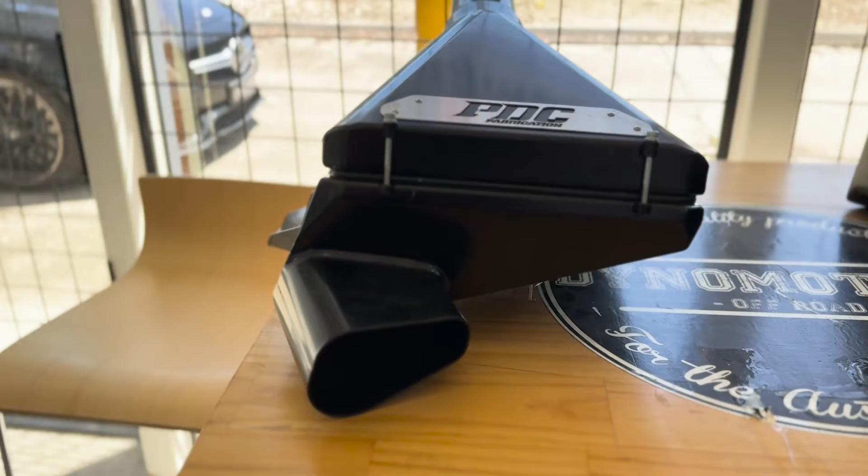air filter as well. And we did all the R&D testing on this one to make sure it did flow. He went back to the drawing board quite a few times to actually get it right. He's a fabricator with mechanical knowledge that it actually needs to work and not just look pretty.

Then we have the AFE cold air intake, and that's exactly what it is. It is a cold air intake, not designed to be plumbed up to a snorkel at all. This is for if you're going to be touring with a caravan on the back, on the blacktop, dusty roads, all of that, that's fine, but it's not made for river crossings. So there's two very distinctly different styles of air intakes for your 300 Series.

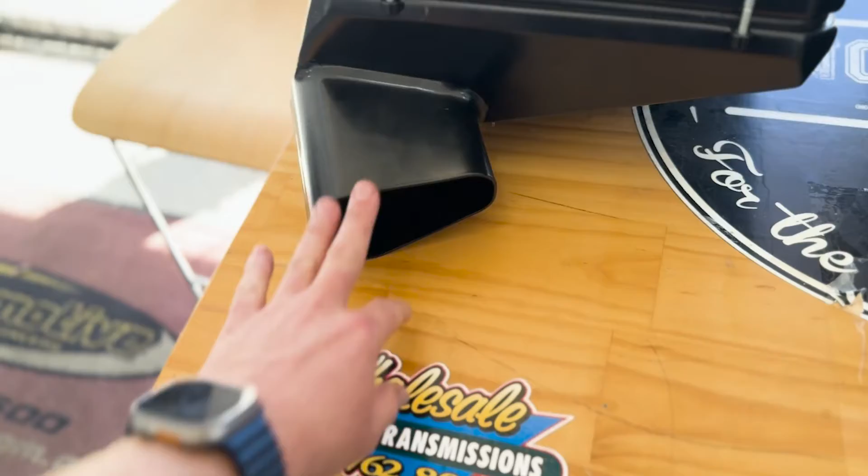I'll spin the camera around, you can check this one out. You can see it's got the pod filter. We've got our intake tube here with the airflow meter, and then obviously the large airbox. And they've done the same, so it's got the larger intake on it. You can see here they've got a large intake hole on it as well where it plumbs up to the guard. It is a big airbox.

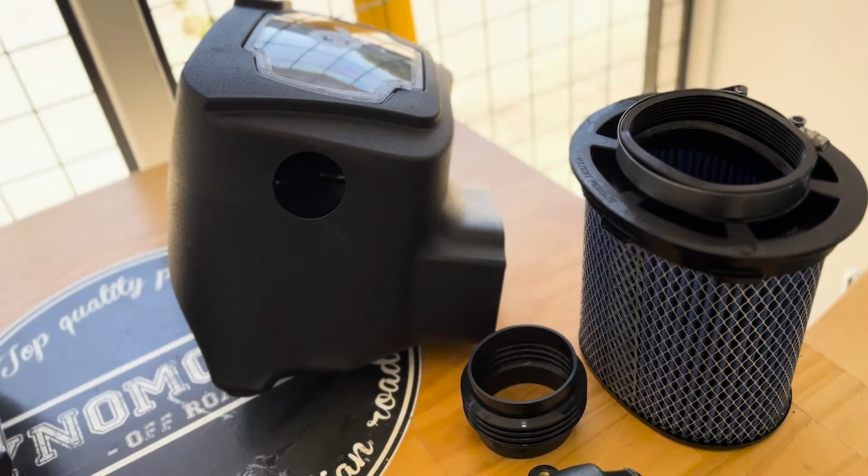Now I personally have had this one here fitted to my 300 Series for 50,000 kilometers now, and there has been absolutely no dust getting past that air filter, which is obviously a win-win.

So we've got dyno results, we'll show you the difference, and I recommend to customers that it's for two completely different purposes. If you're going to go through river crossings, you're going to want that snorkel. This is what you need to do. If you're going to stick on the blacktop and tow your caravan and have a Touareg tractor like me, this is what you need right here. Let's jump into it. Let's see the results of our airbox testing. How good?

We've got the 300 Series behind me. We've got all the dyno results just here, right? And these dyno results are factory. When I say factory, I'm talking factory tune, so we haven't modified anything at all. It came in with that snorkel modified to suit the factory inlet of the factory airbox, okay?

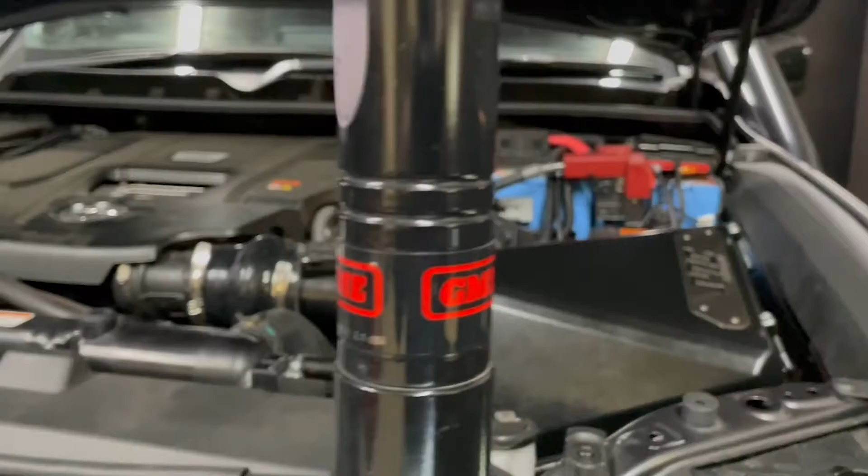And then we fitted the Patrol Doctor one and modified the inlet from that snorkel to suit the Patrol Doctor airbox. So we've changed the factory airbox inlet from the snorkel to the Patrol Doctor airbox. Generally speaking, the factory airbox flow rate is not too bad. It's a lot better than some of the airboxes that we do see, in fact better than a lot of airboxes we see in this sealed condition.

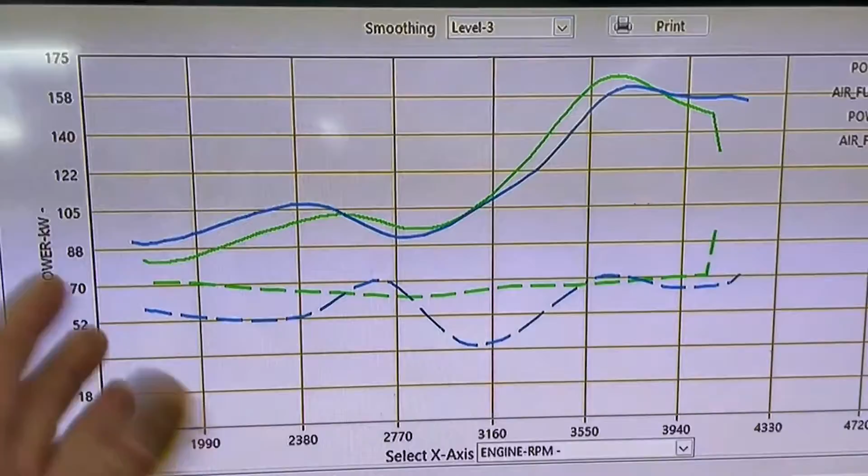But as far as the Patrol Doctor one, it does outflow everything else on the market as far as a sealed airbox is concerned. And you can have a look here. The results speak for themselves. Blue is before, so as delivered, no tune, snorkel bolted up to the factory airbox, okay?

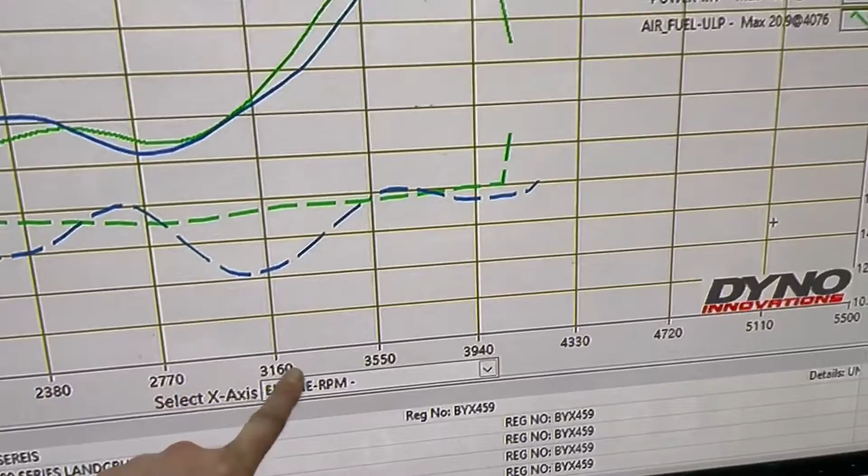And it dips all the way down to 14:1 here at 3160. Now, 14:1 in a diesel, that's not good. You don't want that at all. And then you can obviously see the power up here.

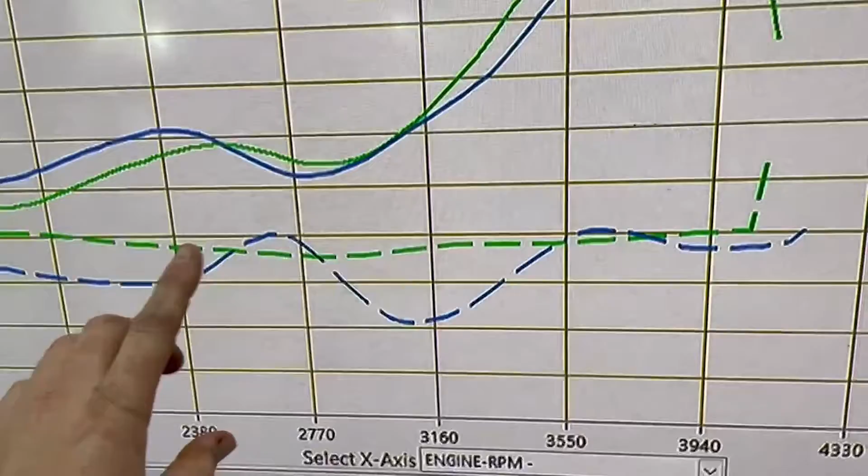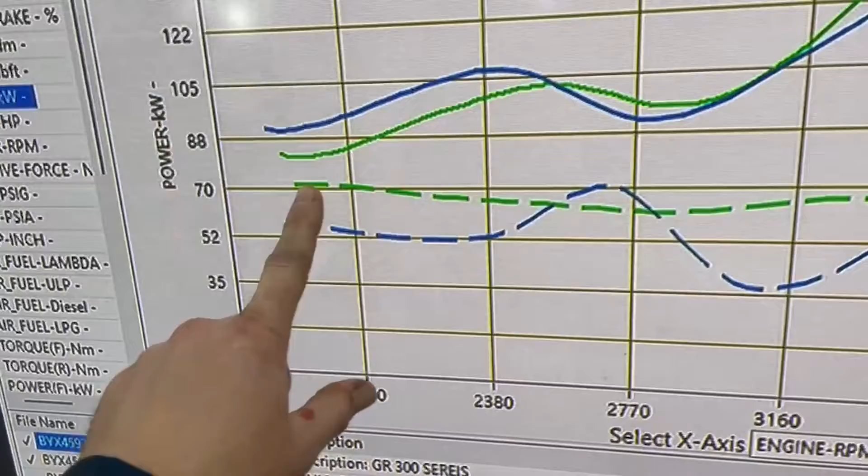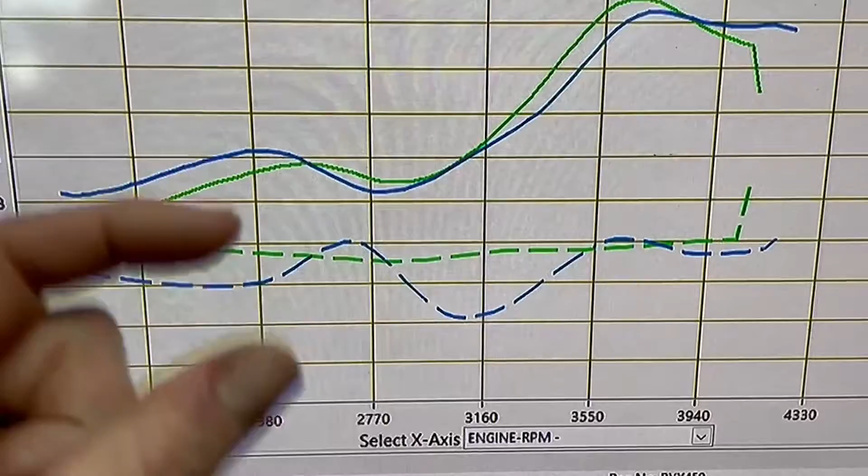So as far as the after results, which is in the green here, you can see, look at that AFR line. 18:1, nice and solid, nice and straight. We can see the power comes up, has a 300 dip, and then it even makes 5 more kilowatts. And all you've done is put an airbox on there and adapted a snorkel to it. And all we've done is adapted the snorkel to the Patrol Doctor airbox and not squished it all the way down.

So when these blokes are going around fitting snorkels to factory airboxes and doing all funky stuff in the inner guard, and it's not just on 300 series Landcruisers, we see it on all different makes and models of vehicles. There's a right way and wrong way to do things. The way this one was set up, it's just not right. Having the Patrol Doctor one in there, you can see it for yourself, 18:1, nice and safe AFRs. And then as far as the power, it's making more power.

So this is the adapter that was used. And the hose clamp was around here with some silicone on it. So you can see that's the restriction going to the airbox for the snorkel. But it's not good. And unfortunately, when we get these 300s in to tune them, and they do have a snorkel on them, and if it is a stainless steel one, not so much the ARB ones, but if it is a stainless steel, this unfortunately is commonplace.

So it's one of those buyer beware. If you're going to put an aftermarket airbox on there, make sure you get something that's suited to the right style of snorkel. If you fit a snorkel to a vehicle, you're already restricting the air to the inlet. The only reason why you'd ever fit a snorkel to a vehicle is if you're going to go through deep river crossings. Other than that, you are restricting airflow to the inlet. You're adding, what, 1.5 meters? It's just the way it works.

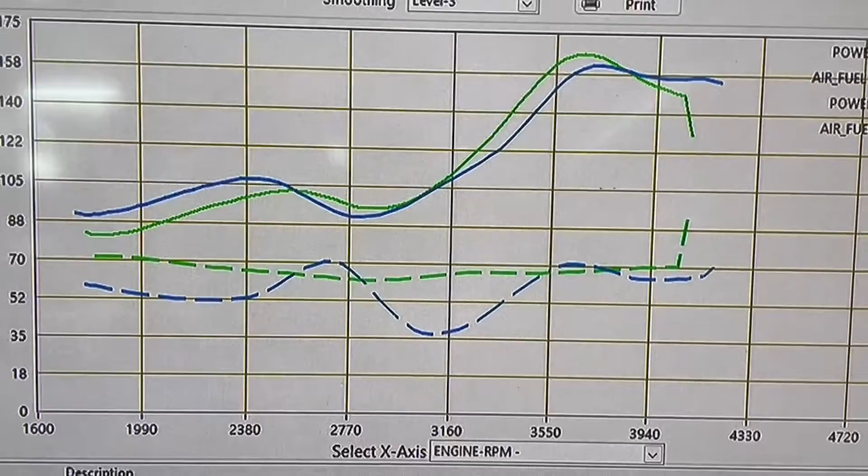It is a restriction. What's even worse is when we see things like this, where you've got maybe a 4 or 5 inch snorkel, and then you reduce it down to that, and then you clamp it like that. It's just never going to work properly. And then that's when you get customers coming in saying, I'm using a lot more fuel, it feels choked, the car doesn't accelerate as good as what it does, and then you end up getting AFRs and power graphs that look like that. I mean, that is just so disappointing to see, and people think that that is acceptable.

I guess it is a true case of buyer beware, do your research, but also ask those hard questions as well. Anyway, thanks for watching. Turned into a bitching session. All it was meant to be is, if you want an aftermarket snorkel, get an airbox to suit. Patrol Doctor for the 300 series outperforms anything else on the market as far as sealed airboxes go.

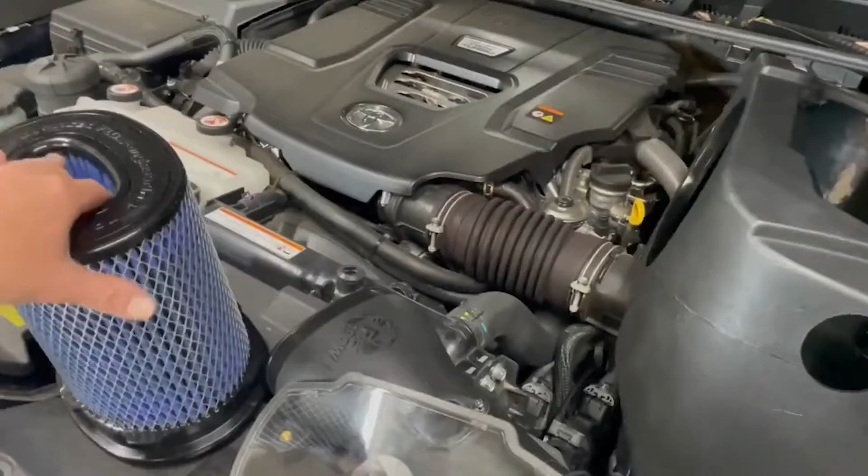Here's the 300 series AFE cold air intake. Obviously we've got our air filter here. Now this is a reusable air filter that can be cleaned out. And we've got the intake duct with our airflow meter. Obviously we've got our silicone coupling on the end there.

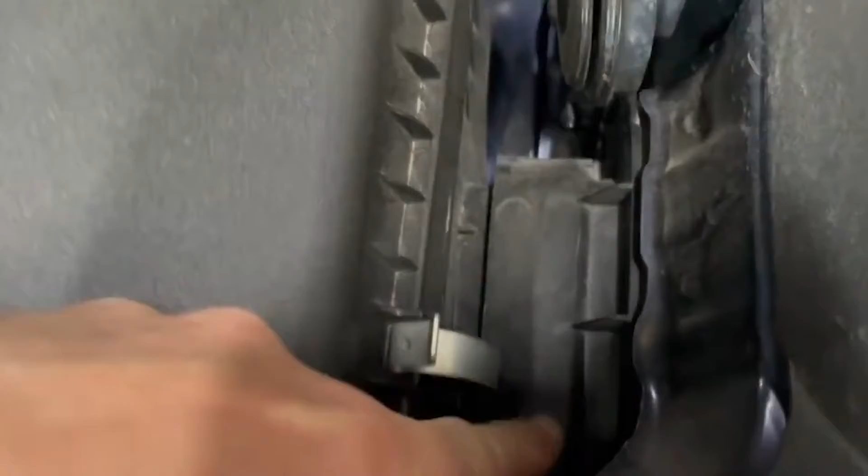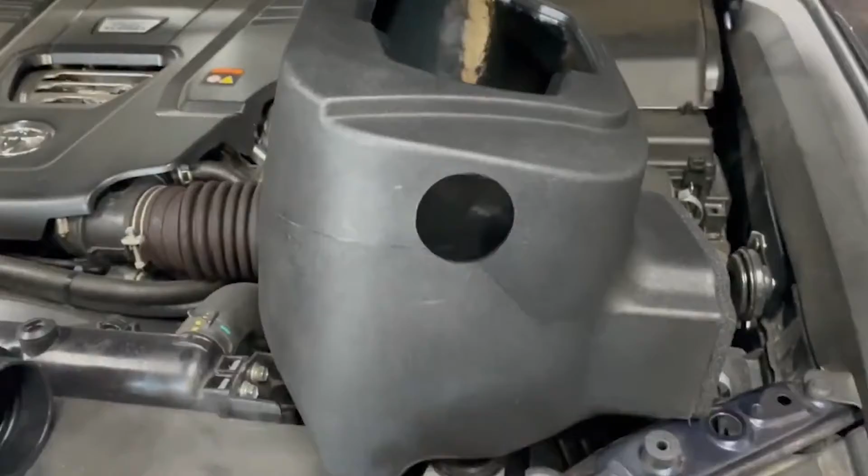You'll notice I've got this piece of plastic and grommet that goes in the side here. You'll notice as well that where the standard intake ducting comes through the side here, we've got the seal for the standard intake ducting to couple up to. So I'm really excited to see the volumetric difference between this and the standard air intake or airbox.

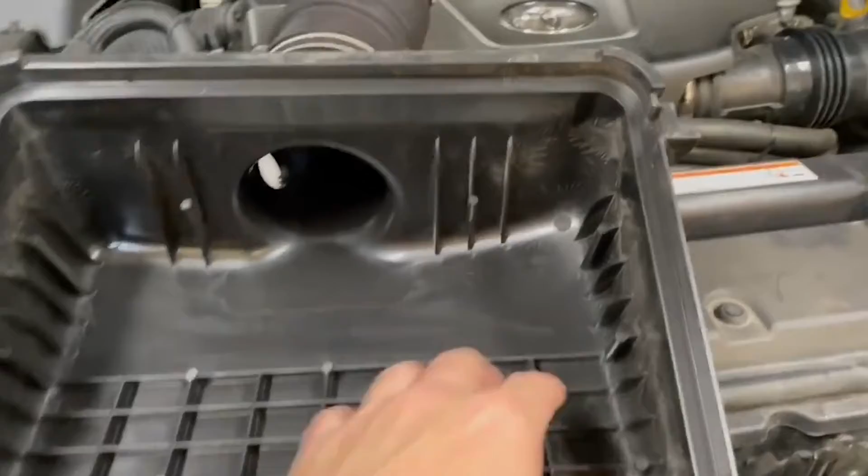I'm also really excited to see if this one's actually going to seal, because I did a video a while ago after I'd done 5,000 Ks, I've done nearly 30,000 now, showing what the inside of the airbox or the air intake, so the upper lid, looked like, and it's covered in dust. So this is going to be good. Very, very keen to see what the guys at AFE have come up with.

So I got my mate Rich here. Now he's going to be doing the install on the airbox on the 300 series. There's a couple of things that you mentioned to me tune-up wise, yeah. Which was one, you're going to be interested to see how much more airflow, and you said to me because it needs it. I did, yeah.

So we all know that, well, we know, I'm not sure if the public knows, they're extremely rich. Rich means, in simple terms, that it gets a lot of fuel for the amount of air that it's receiving. We are seeing a lot of diesels go down that path currently. It's a good way to get more power out of them.

But I'm very interested to see if this leans it off, meaning that it's getting more air again. If it leans it off, and it leans it off considerably, we'll be able to get more fuel back into it using the Unichip, which, in turn, will equate to more power and more torque. So yeah, I am very interested in seeing how this goes.

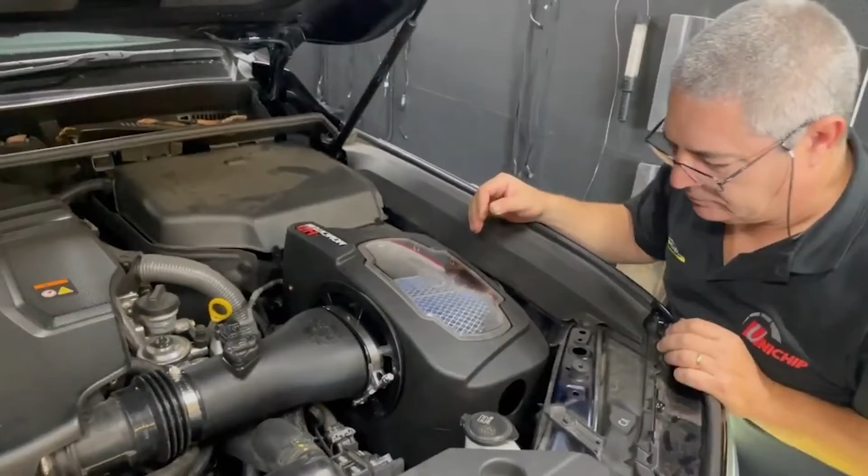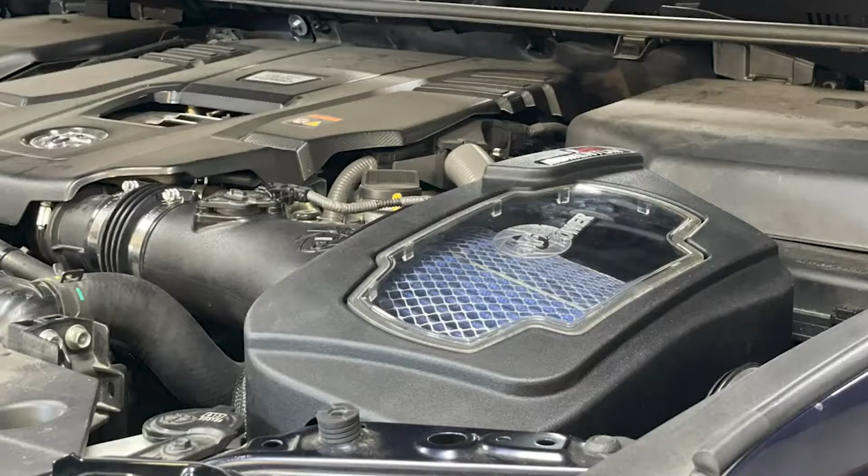It's been 10 minutes and we're coming to the pointy end of the stick with the install on this airbox. Seriously, really easy to fit. Obviously all the work has gone into the R&D of making this fit bang up and be really, really straightforward. If you have a look at what Richo's done here, it's just doing up the last hose clamp, but look at that. It's fantastic. Looks good. I just want to see the results.

Just about. We've got her up on the dyno. See the results back to back. No tune.

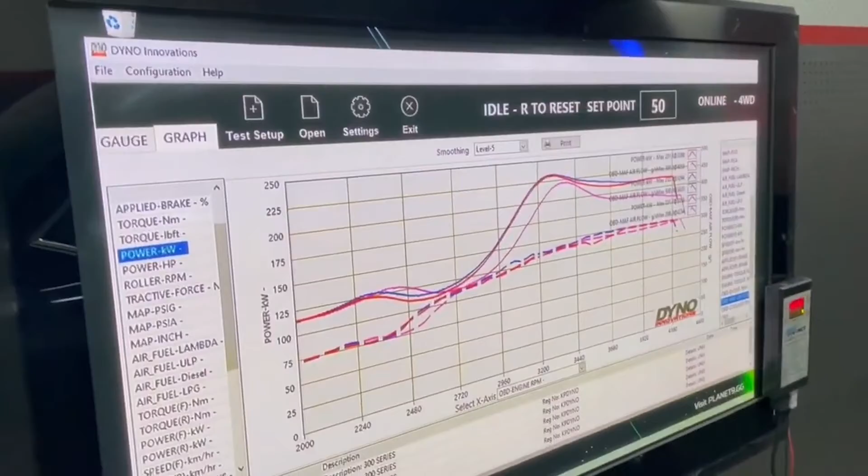All right, so yeah, first impressions, quite impressive. Picked up probably a good 10 kilowatts pretty much everywhere, especially where it changes over the turbos and goes to the bigger turbo. Holds onto the power a lot better in the higher revs.

You can see here we've also connected to the OBD data with the dyno, and this is actually measuring airflow through the factory airflow meter. So you can see the blue, it's obviously in grams per second. It's just a scale of 100 to 500 grams per second. So you can actually see, even from the live data from the factory ECU, that we're actually flowing a lot more air. Hence it's made more power.

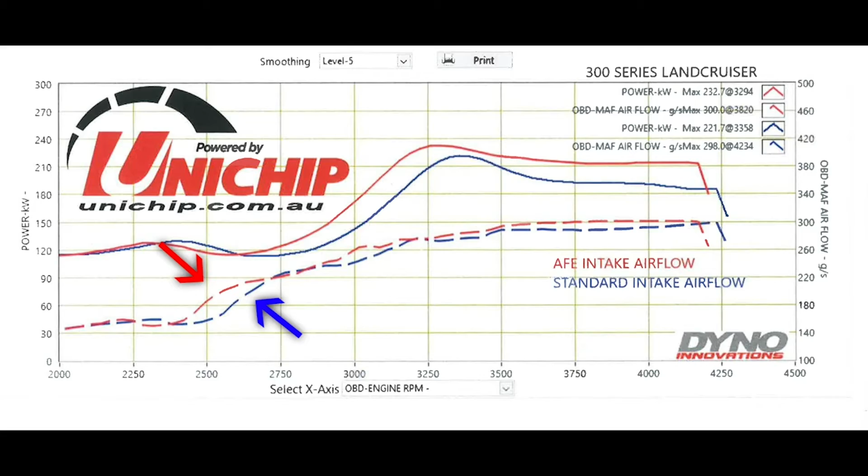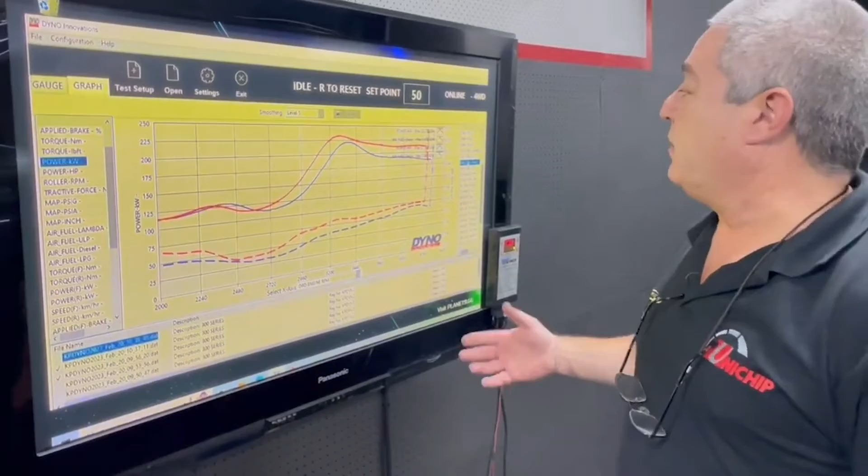But if we look at our air fuel ratios, because more air is going into the engine, I bet you it's going to make our AFRs a lot leaner, as I expected. Obviously the greater airflow has made our air fuel ratio even leaner, which is safer on a diesel. Obviously the higher the numbers in the air fuel ratio, the safer it is.

Yeah, picked up sort of 50 Newton meters of torque as well. So yeah, obviously everything comes up. Power, torque, airflow's up, and the engine's running leaner. So it's all a plus with a simple bolt-on, quite cost-effective upgrade.

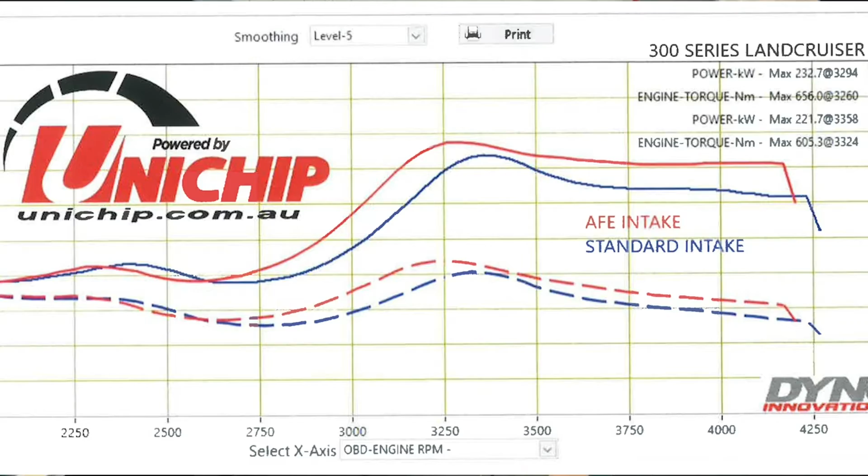So now the $1 million question is, I guess people are going to try and compare. You can't compare the two. Sealed, open, for snorkel, not for snorkel, but people will want to know what the flow rate is. The AFE did flow slightly more than the Patrol Doctor airboxes. They're two very different intake systems for two very different purposes, so you need to bear that in mind.

But both of these, we give the tick for the best airboxes in the country currently available. So do your research first, make sure that they flow before you go spending thousands of dollars on something that is a nice looking piece of junk.